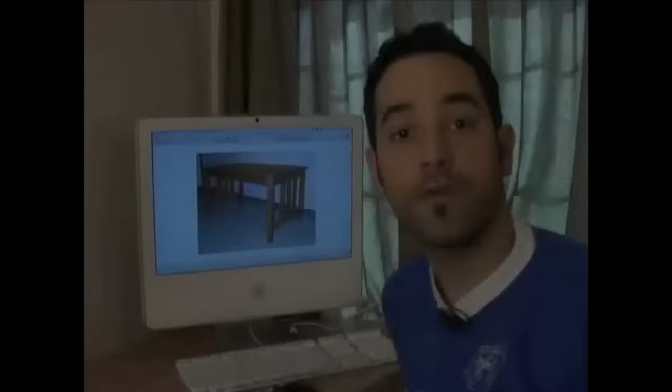So the first order of business is to make a list of the dimensions that we're absolutely sure of. Now, we know we want the table to be 36 inches deep and 72 inches long. We also know that we want it to be about 30 inches in height, and that's an average desk height, meaning with a 3/4 inch top, our legs should be about 29 1/4 inches long.

The legs themselves, I'm going to go with a 3 inch by 3 inch square leg. That'll be nice and sturdy for a 6-foot long table.

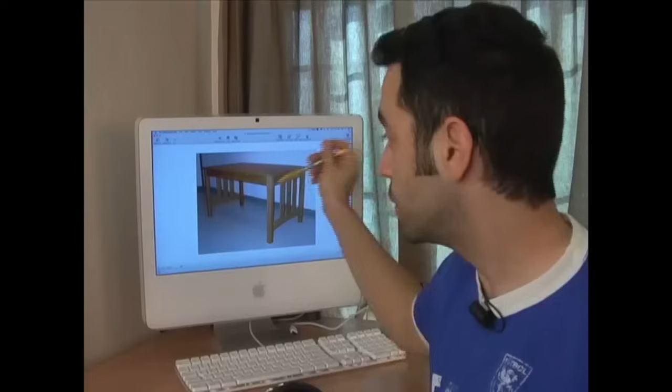And the next thing for us to look at are the aprons. We've got a nice long apron in the front and back, and then shorter aprons on the sides, and we need to determine what the optimal length would be for those.

The easiest way that I know to do this is to draw it out. I like to envision flipping the table upside down and looking at an overhead view where you could see the leg, the apron, the table's dimensions. You could lay everything out that way, and it becomes very clear once you do.

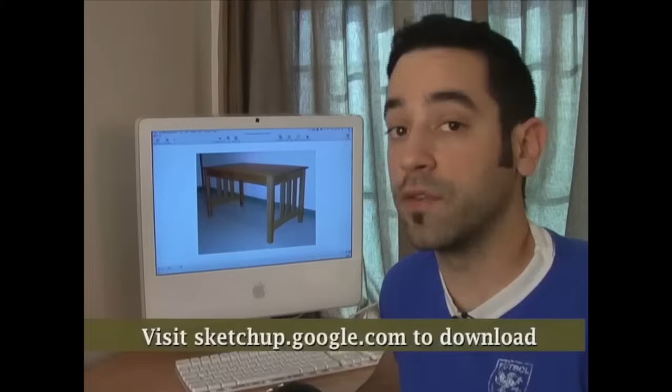So either get a ruler and a piece of paper and start drawing it out, or you can use a program like I use called SketchUp. It's a free program that's available from Google. You can get it for a PC or a Mac, and if you have a computer with an internet connection, you should be able to run this program with no problem.

Now, it is a very, very deep program. You could really get into some really cool stuff with it. For me personally, I use it as a tool to quickly organize, get my dimensions all straightened out, and make sure my proportions look good. I also use it as a sales tool sometimes to give that to my customers when they want to see a 3D rendering of what their project will look like.

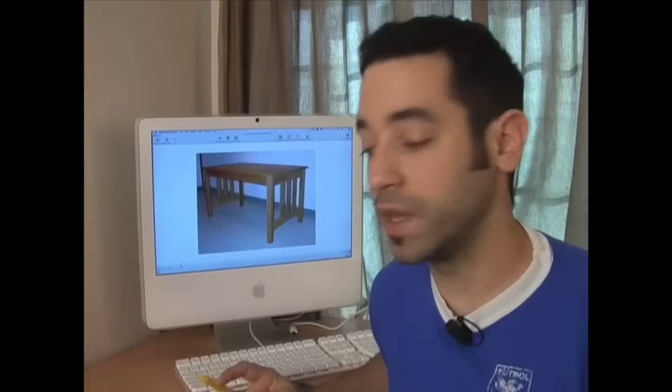In this case, we're not going to get into any of that. We're going to keep it very simple. We're just going to draw out the basics so we can determine what our final numbers are. So let's go ahead and take a look at that.

Let's start by drawing the tabletop. I use the rectangle tool to do this. Just click to a point where you want the rectangle to start, type in the length and width separated by a comma, and hit enter. The rectangle should be exactly 36 inches by 72 inches.

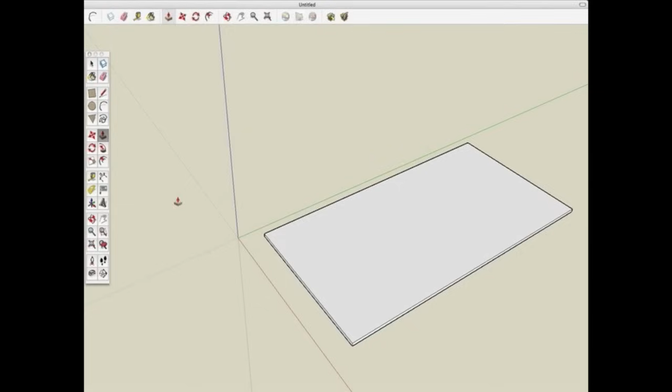Next, I select the push-pull tool, select my rectangle, start pulling it in a direction I want it to go, and then type in 3/4 of an inch.

The next thing I'd like to do is add a leg. In order to do that, I want to make sure that the table overhangs the legs by 1 inch on each side. So I need to draw that square in 1 inch from one side and 1 inch from the other side. So I use the measuring tool to just put layout marks on a tabletop, 1 inch in each direction, and then I use the rectangle tool the same way we did with the tabletop, and just type in 3 inches, 3 inches, enter, and it should give me a nice 3x3 square.

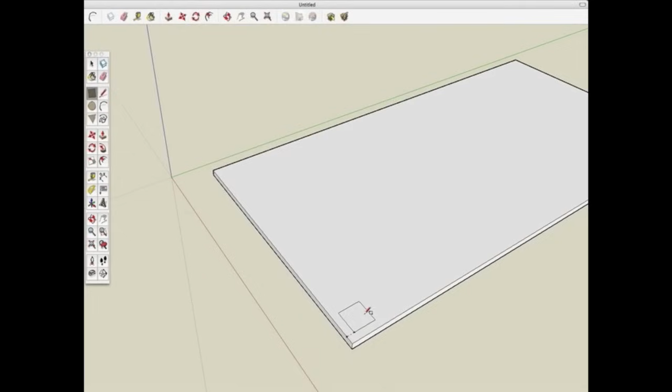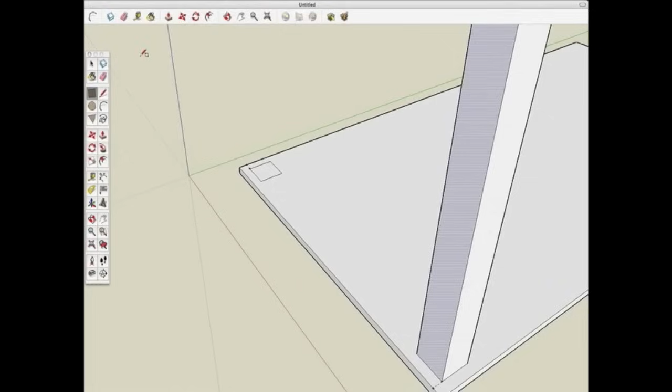Next, I use the push-pull tool to extend the leg up to 29 1/4 inches. Now, I know there's a smarter way to do this in SketchUp. You can create models and objects that could be reproduced and just copy and paste it in the drawing, but I'm not too familiar with it, so I'm just going to quickly redraw another 3x3 square and use the push-pull to bring it up to 29 1/4 inches.

Finally, I add a third leg, just like the other two. We only need 3 legs to get the answers to our questions here, so I'm not going to bother with the fourth. At this point, it's relatively easy to determine what the length of our aprons is going to be. We've got a side apron here, our long apron for the front and back is over here, and we could simply just strike a line and measure it.

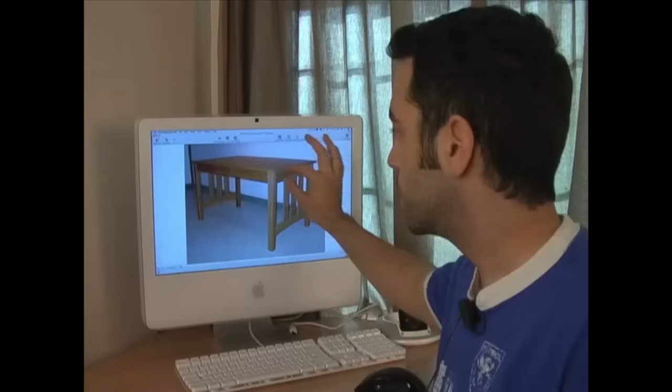But right now we want to take it one step further, and I'd actually like to draw the entire thing in there. So what we need to do is look at our picture again, the original JPEG image. From what I see here, it looks like our aprons are probably a little bit wider than the width of the legs. So if the legs are 3, I'm thinking it's pretty fair to call those aprons 3.5 inches. Let's go ahead and draw those in and see where it takes us.

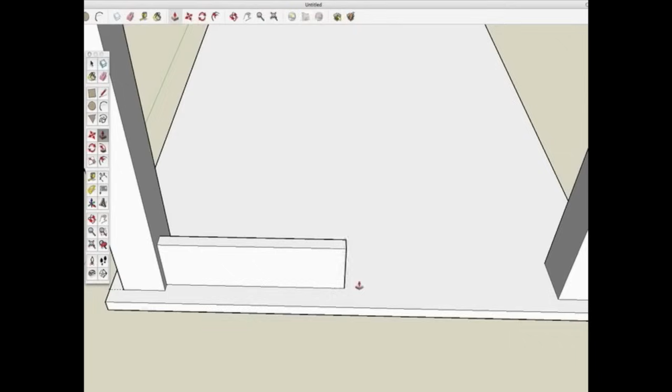I want the aprons to be about a 1/2 inch in from the outside edge of the leg. So I use the marking tool to place a reference mark on the leg itself. Using the rectangle tool, I draw a 3.5 inch by 3/4 inch rectangle on the inside face of the leg. And using the push-pull tool, I pull the rectangle to the inside face of the other leg. I then repeat the process for the front apron.

Now the next thing we have to do is determine the location of these bottom curved rails. Again, using the picture and elements in the picture, you could determine where the location of that piece will be. For me, I'm looking at this distance - how far is it from the bottom of the leg? In relative terms, looking at other things in the picture, it looks to me like it's about twice the thickness of one of these legs. So if the legs are 3, I would say this is about 6 inches from the bottom of the leg, and that's where we're going to start drawing it into SketchUp.

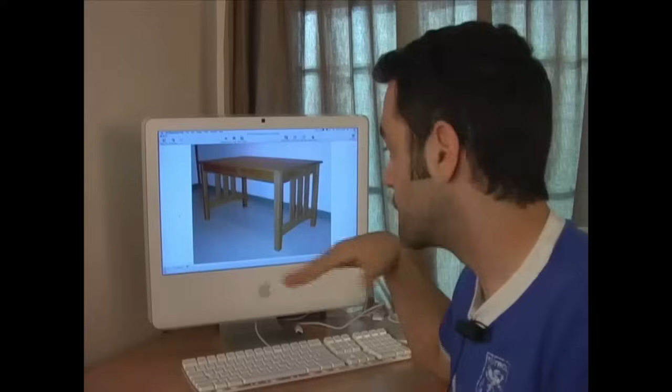Using all the same methods as before, I add the bottom rail 6 inches up from the bottom of the leg. Now let's take a look at the vertical slat pieces here on the side. This particular picture shows 3, and to me they look like they should be about 3 inches wide. But given the numbers that we have, when I place 3-inch wide slats in there, it just doesn't seem to look right. There's too much space on either side.

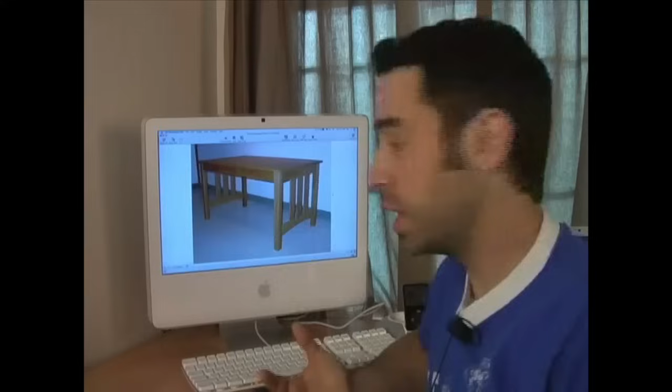So I'm actually going to add a 4th in there. There will be 4 3-inch slats across this distance, and we have to figure out how we want those spaced. That was just trial and error. I know I want a larger space in the front and the back, and a smaller space in between. What works out really well for me is 5 inches till the first slat, then a 3-inch slat itself, and then 2 inches in between each, and that gives us the exact distance across here.

I did draw that to confirm it in my picture, so let's take a look and see how that turns out. Using the marking tool, I place reference marks from left to right at 5 inches, then 3 inches for the slat, then a 2-inch space, then 3 inches for another slat, and so on. Next, I use the rectangle tool to draw each of the slats. Then using the push-pull tool, I extend each slat to the bottom rail.

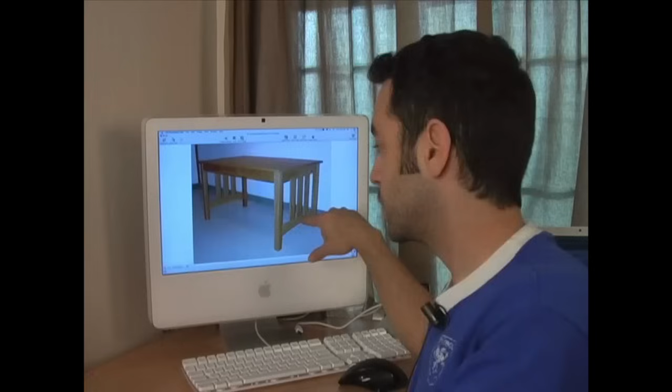Now the one last detail, which I'm not going to bother putting into the SketchUp drawing since it's just too much work, is the fact that these slats will actually give a bit of a reveal where they meet the cross rails and the top side apron. So these are going to be about a 1/2 inch thick, and then the aprons themselves are going to be 3/4 of an inch thick, and that'll give a little 1/8 inch reveal on either side of these slats and just give it a little bit more visual interest and appeal.

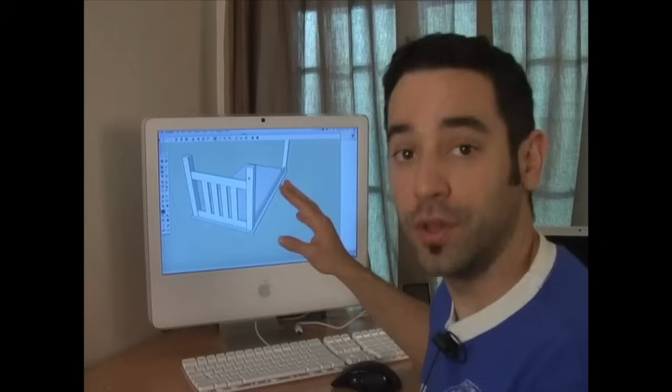So you can clearly see that I'm not a professional SketchUp user. I'm certainly not an advanced user by any means. I do what I need to do to get the job done, and I know there are much better ways to do some of these things, and I'm trying to learn those, and as soon as I learn them, I'll definitely show you guys. But I don't really need to know that much to get this far, and it didn't take very long for me to do this.

Keep in mind that these final dimensions do not include the extra length required for tenons. I plan on using a loose tenon construction method for all of my joinery. Now if you decide to use traditional integral tenons, add 3 inches to the length of all of your apron pieces and 2 inches to the side slats. This allows you to make a 1.5 inch tenon on the aprons and 1 inch tenons on the side slats.